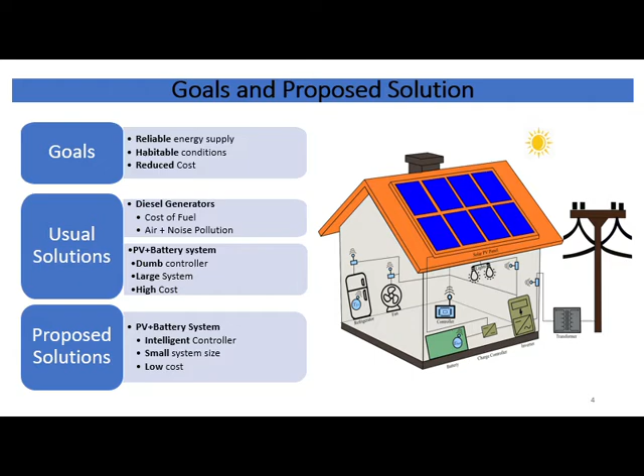What can intelligence exploit? It is a pertinent question at this point. To answer it, let us first have a look at the system. It consists of a house installed with PV modules and a battery storage unit. The electrical loads considered within the house are refrigerator for storing and keeping food items fresh. This is considered to be a critical primary load. Lights for providing illumination at night and fans for providing thermal comfort. Both of these together are considered to be critical secondary loads.

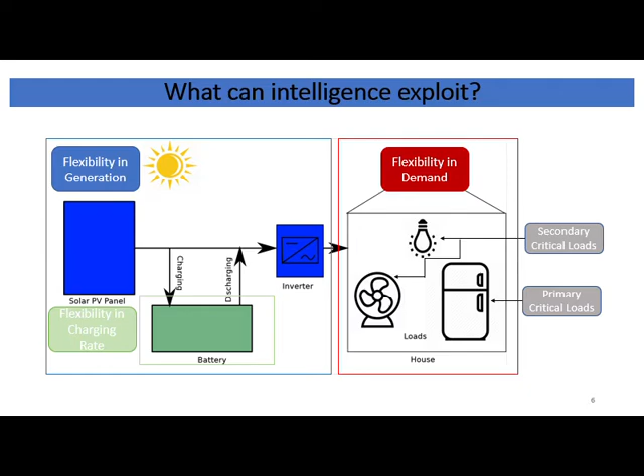Now, we have flexibility in generation as excess PV potential can be stored in the battery and be used when there is no solar energy or less of solar energy. Also, there is a flexibility in the battery charging rate so that it can be charged either in a fast or normal charging mode. However, fast charging degrades battery life. Finally, there is flexibility in demand as the primary critical load, that is the refrigerator, has a high priority over secondary critical loads, that is the lights and fans. All these different flexibilities provide an opportunity which can be exploited by an intelligent controller to meet the desired goals. However, a simple rule-based controller which accompanies the current residential PV battery systems is incapable of utilizing these flexibilities, as more sophisticated mathematical construction of the problem is required for the same.

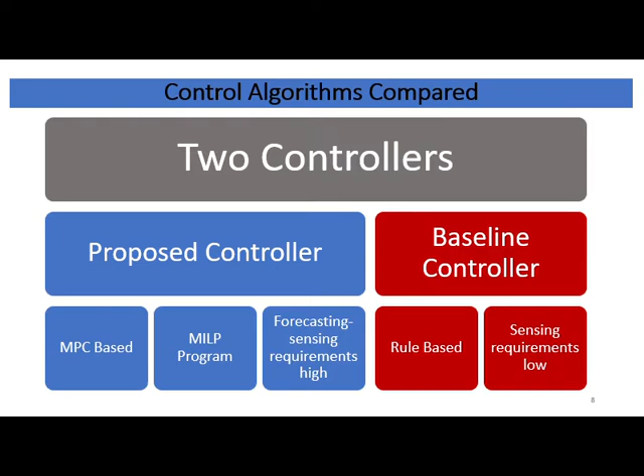During the literature review, we came across Prince et al. 2019, which was the only relevant piece of work similar to ours, which shows the lack of focus of the controls community in general towards this problem. However, it ignores the mixed integer nature of the problem arising out of on-off decisions to be made for the electrical loads, and it did not consider the flexibility in battery charging rate. We have accounted for both these caveats in our proposed controller. We will be looking at two controllers, the proposed controller, which is an MPC-based controller with a mixed integer linear program, and a baseline controller, which encapsulates the rule-based controller logic of the currently installed residential PV battery systems.

Here we see that the refrigerator deadband controller turns the refrigerator on when the internal refrigerator temperature goes beyond the allowed maximum. It turns it off when the internal refrigerator temperature goes below the allowed minimum, and otherwise uses the previous control command.

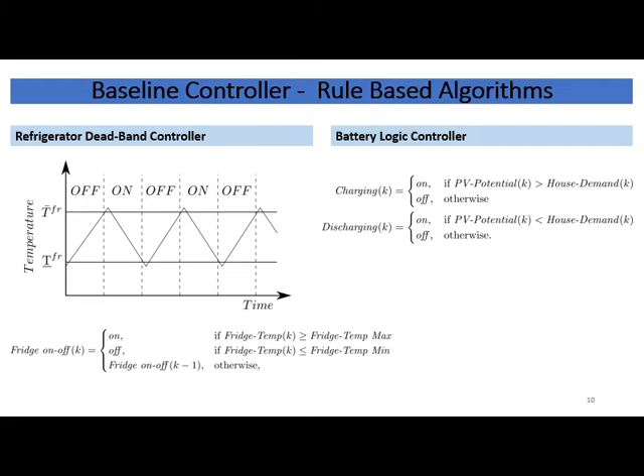Now, looking at the battery logic controller, we can see that it creates the charging command when the PV energy potential is greater than the house load demand, and creates the discharging command when the PV energy potential is less than the house load demand. Also, both the charging and discharging commands are complementary.

The figure illustrates the proposed controller schematic. This is a model predictive controller with a mixed integer linear program. Hence, we have state feedback, which in this case are the refrigerator internal temperature and the battery state of charge.

The other information required by this controller is forecast of the energy generated from the PV panels, hence a PV energy model is required, predictions of the internal house temperatures, which require a house thermodynamics model, and the demand trajectories of the secondary critical house loads, which are lights and fans. All this information is required for the entire planning horizon.

Also, in order to make energy forecasts and house temperature predictions from the PV energy model and the house thermodynamics model respectively, weather forecasts are required for the entire planning horizon. The outputs of the controller are the control decisions for charging/discharging status of the battery, battery charging mode, either fast or normal, and on-off status of the primary and secondary critical loads.

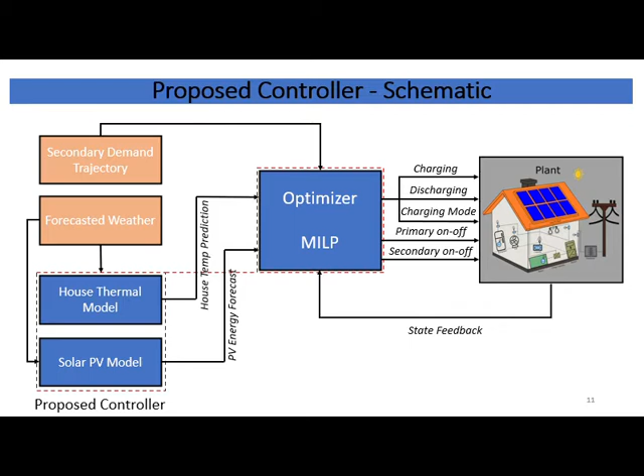Let us look at the MILP problem formulation. The following equation is the cost function, which tries to minimize the refrigerator temperature slack, to keep the refrigerator temperature within desired bounds. It tries to maximize the battery state of charge so that the PV panels are used at their maximum potential and the system has optimal energy stored to supply the house load demand.

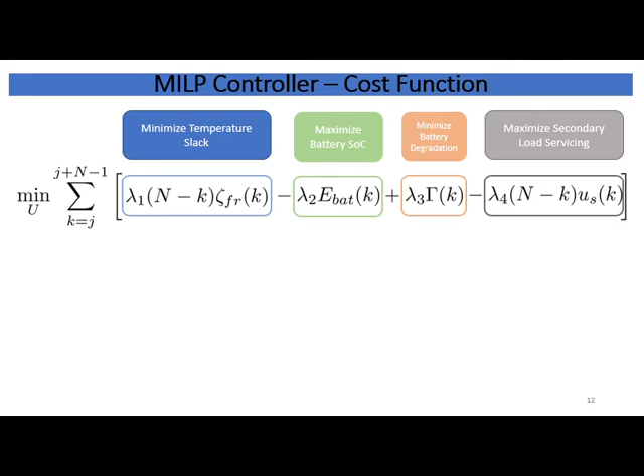It tries to minimize the battery charging rate to avoid fast charging where possible and, as a consequence, reduce battery degradation. And it finally tries to maximize the secondary critical load control command to optimize the secondary critical load servicing.

Let us now take a closer look at the first term of the cost function. The lambda is a scalar weight which is heuristically tuned to obtain the desired response. The N-k term is a time index dependent constant weight, and the rationale behind it is that we care about the objective being met in the early part of the time horizon as compared to the latter part of the time horizon.

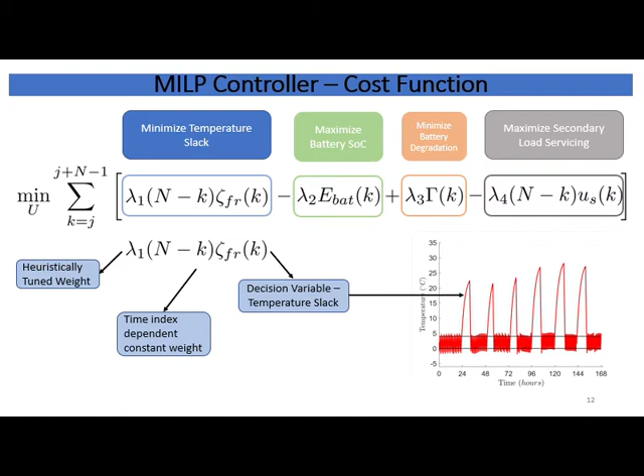The zeta FR variable is the refrigerator temperature slack variable, which takes positive values once the refrigerator temperature goes beyond its desired maximum, as can be seen in the figure to the lower right. This avoids infeasibility. The remaining three terms of the cost function have also been designed with similar rationale.

The constraints for the MILP problem include the linear dynamic constraints of the refrigerator thermal dynamics and the battery storage dynamics. The energy balance constraint provides for the generation-demand equilibrium. The refrigerator temperature is bounded between desired minimum and maximum. The refrigerator temperature slack is introduced to avoid infeasibilities and by construction needs to be non-negative.

The battery state of charge is bounded between the maximum and minimum battery energy capacity. The battery charging and discharging rate is bounded between an appropriate lower and upper bound so that it can provide for discharging and both the modes of charging.

The secondary critical load control command is bounded below by 0 and above by 0 unless the secondary critical load demand trajectory is positive. This reduces the degrees of freedom for the secondary critical load control command but improves performance. And finally, the solar energy production variable is bounded below by 0, as production cannot be negative, and bounded above by the maximum energy potential of the PV.

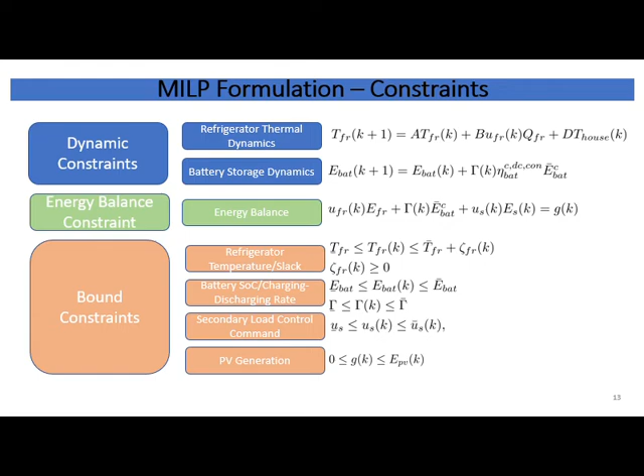The implementation of the primary and secondary critical load control commands is straightforward, as the proposed controller provides binary control commands which can be directly used to control a smart switch. However, the implementation of the battery control command is not straightforward, as the battery charging/discharging rate variable is continuous and it has to be converted into discrete control commands using the illustrated rule-based logic.

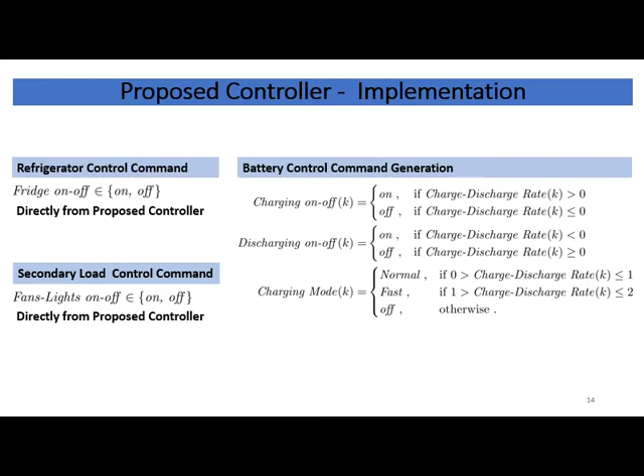A one-week simulation is conducted starting on the day Hurricane Irma had its landfall in Gainesville, Florida in 2017. The weather data is obtained from the National Solar Radiation Database. The PV battery system size is 1 kilowatt and 5.4 kilowatt hour respectively, and the house has one refrigerator, 6 LEDs, one each for every room in the house, and 4 fans, one each for every bedroom in the house.

For the MILP computation, a planning horizon of 24 hours at 10 minutes resolution is used, resulting in 144 time steps in the planning horizon. This MILP is solved with Gurobi solver on a desktop Linux computer with 8 GB RAM and 3.6 GHz octa-core processor.

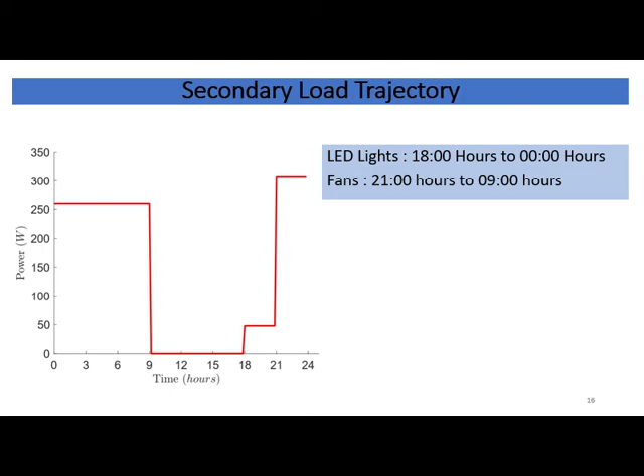The figure illustrates the secondary critical load demand trajectory for a 24-hour period, which is constant for each day of the 1-week simulation period. This trajectory is user-defined. In our case, the user desires lights to be on during the evening and the fans to be on during the night.

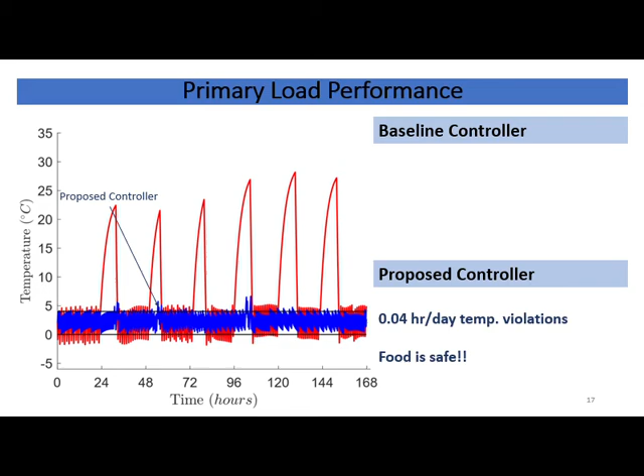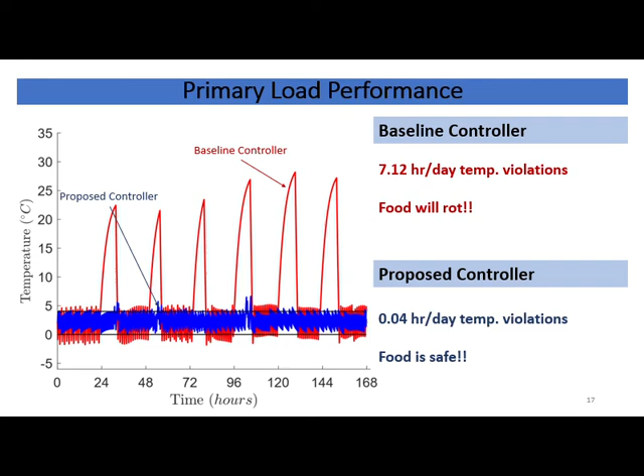The figure below illustrates the primary critical load performance for both the controllers. The plots in blue and red represent refrigerator temperature for the proposed and baseline controllers respectively. We can see that the proposed controller is able to maintain the refrigerator temperature within bounds throughout the simulation, which avoids rotting of food. The baseline controller on average causes 7 hours per day of refrigerator temperature violation above the desired maximum, which according to the CDC guidelines is 3 hours higher than required for food safety, which will definitely cause food to rot.

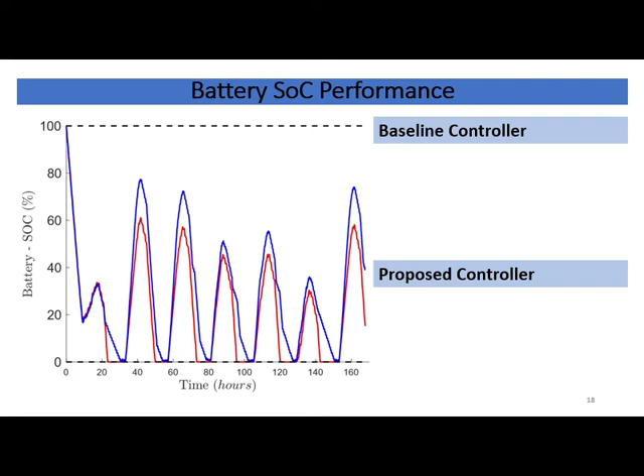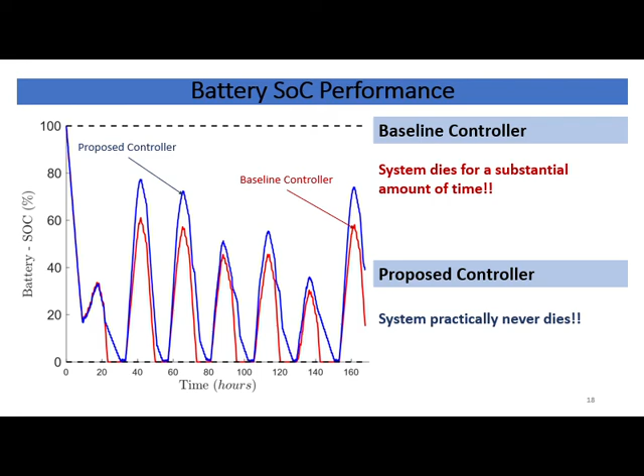The figure below illustrates the battery SoC performance for both the controllers. The plots in blue and red represent the battery SoC for the proposed and baseline controllers respectively. In case of the battery SoC, the period for which it stays at its minimum value is considerably negligible for the proposed controller. That is, practically the battery never dies. Moreover, the usage of the fast charging mode by the proposed controller is seen when battery SoC peaks are compared with that of the baseline controller.

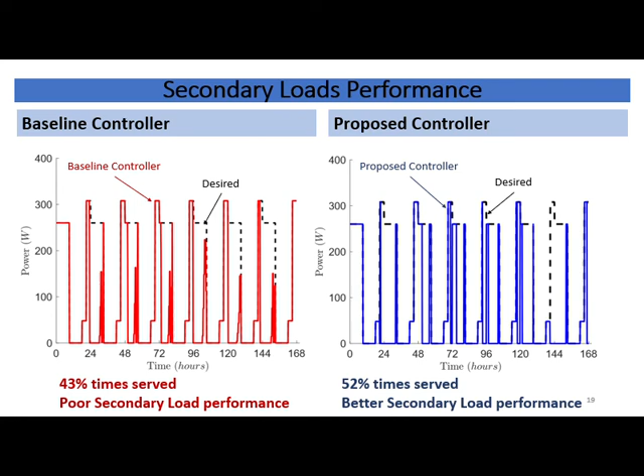The figures below illustrate the secondary critical load performance for both the controllers. The plots in black are the desired secondary load demand trajectory, and the plots in blue and red are the served secondary critical load demand for the proposed and the baseline controllers respectively. The proposed controller serves the desired secondary load demand 9% more compared to the baseline controller. This performance superiority of the proposed controller is attributed to the information it consumes in terms of forecasts and predictions, and making trade-offs between conflicting requirements by solving an optimization problem.

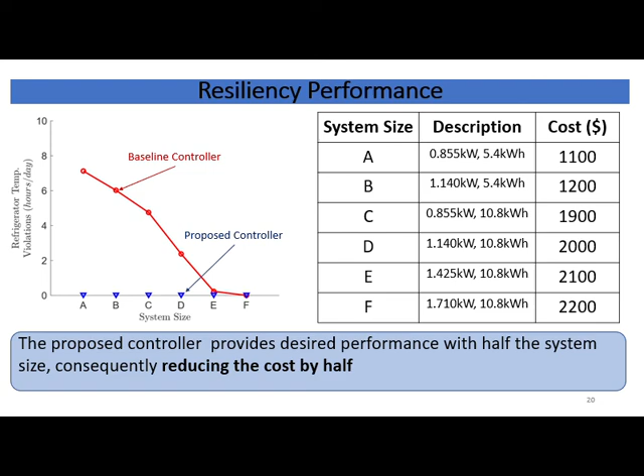The MILP optimization problem solves for 1008 decision variables, out of which 288 are binary. This makes it a hard problem to solve. Using Gurobi with 1% optimality gap setting gives an average solver time of 1 minute per MPC iteration. However, the time limit setting had to be used to stop the solver, as this problem can lead to stalling of the solver for certain iterations. With time limits set to 5 minutes, the solver stalled for 7% of the simulation duration.

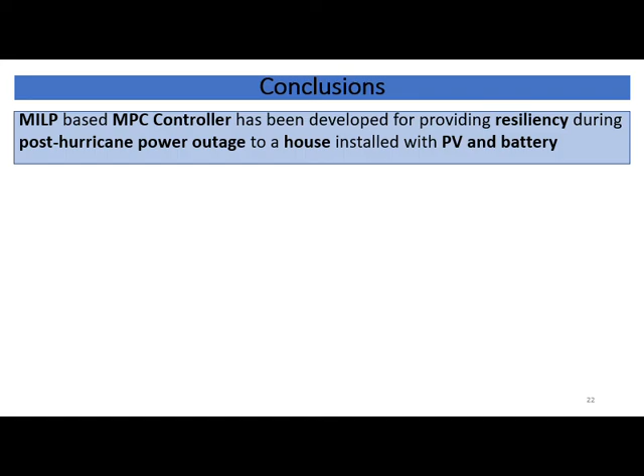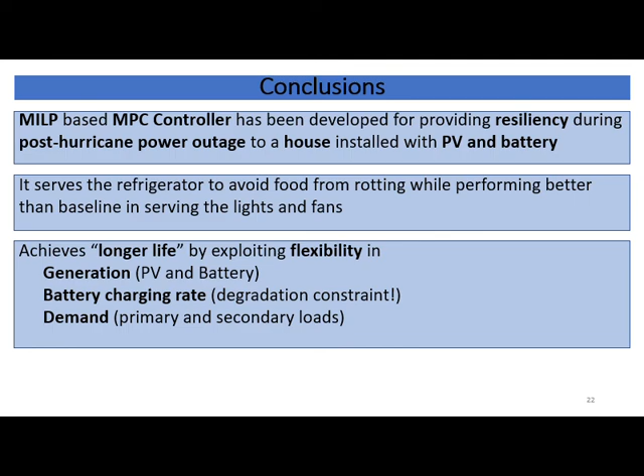To summarize, a MILP-based MPC controller has been developed for a residential PV battery load system for a post-hurricane power outage scenario. Its performance in regards to primary and secondary critical loads has been shown to be superior as compared to a baseline controller through simulations, and this is directly attributable to its ability to exploit the flexibilities in the generation, battery charging rate, and the demand. Finally, its economic benefits have been shown to be 100% more than the baseline through a resiliency performance study using systems of different sizes.

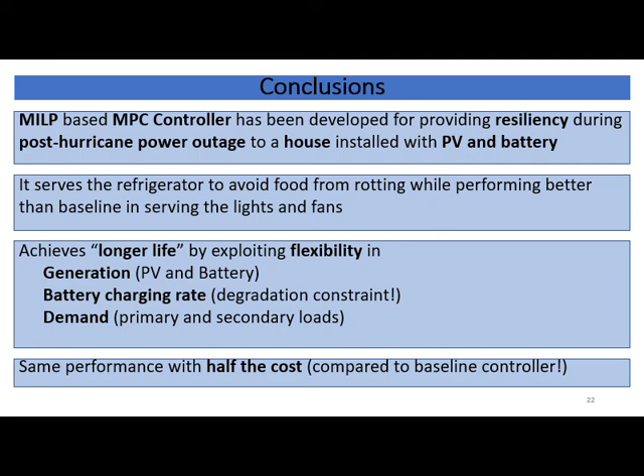For future work, we need to analyze the proposed controller's sensitivity to forecast errors. There is also scope for reducing its sensing and forecast requirements. And finally, we need to find a computationally cheaper way to solve MILP-based MPC problems.